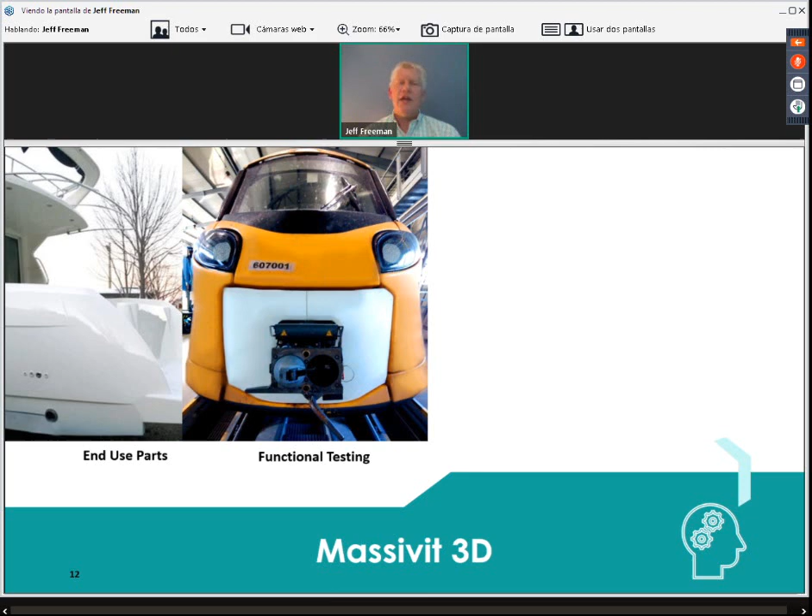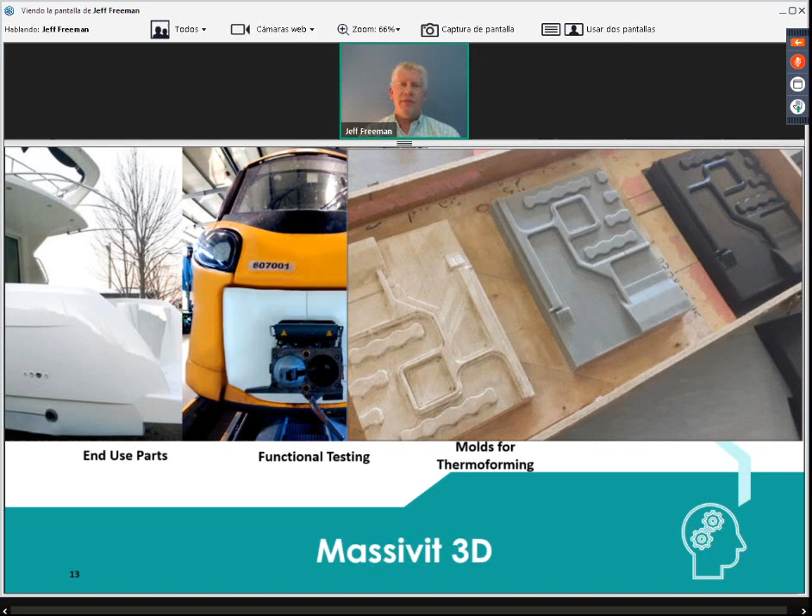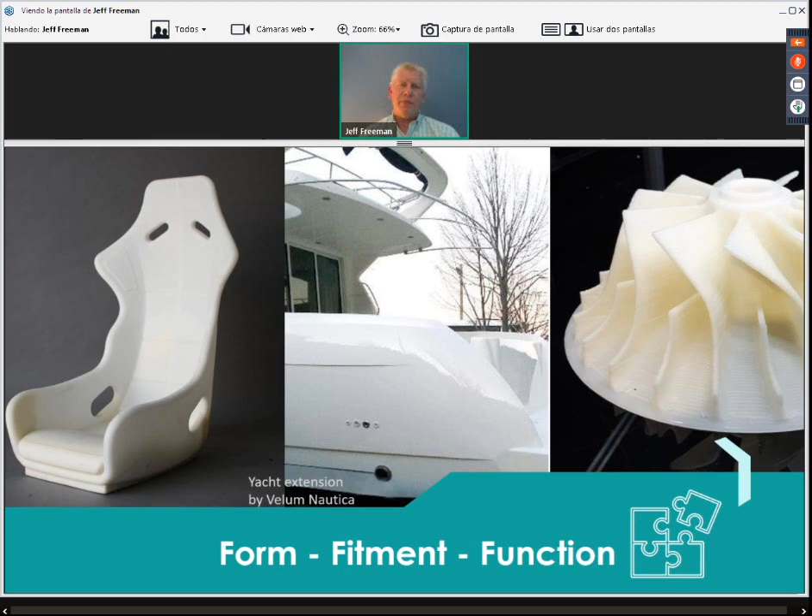This is the ability to get end-use parts—parts that can be used out on the water if you're on a yacht, or say you want to do functional testing on a railway system. We're talking about large pieces, and if you have to apply for a train schedule in order to run testing, you have a real limitation in how long it takes to produce those parts. Molds for thermoforming are very expensive to produce and often have very long lead times. So what we're able to do is actually print those molds, even large ones, using the Massivit GDP process. Traditional prototyping is often used for 3D printing and additive manufacturing, but now we're able to do it full size—form pieces, fitment pieces, functional parts.

Beyond that function, one use is using the mold to produce plastic pieces. The items on the left of your screen are actually a mold that was printed with one of our partners out on the West Coast. It's for an aerospace plastic part. We were able to print that mold, then they were able to finish it and use it to pull plastic. We offer a full proof of concept white paper for that. Anybody interested can look on the right side of the screen.

You can expand the panel and you'll see it as a handout. Our product brochure is there along with this proof of concept white paper, which talks about how they were able to print the mold very quickly and produce over 50 parts, with all of the data included.

On the right side, you see some typical point of purchase displays. It's a very dynamic industry—they need to move very quickly, so you want to be able to produce molds very quickly. In a complete opposite turn, which we'll get into detail on later, you can actually print the mold and then fill it with concrete, plaster, or other fillable material. Using the Massivit, you get end-use parts printed out.

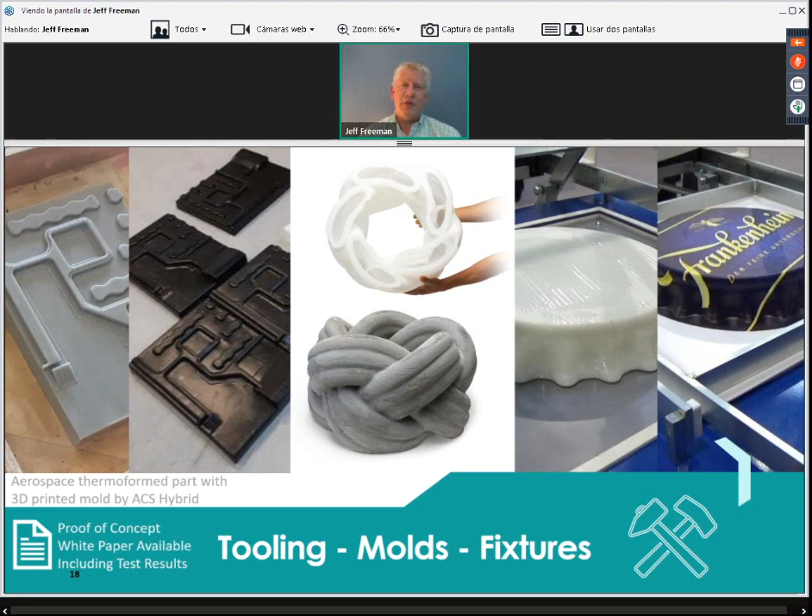So what we've talked about so far is just a few of the applications for end-use parts. Installation and fitment checks of full-size parts are uncommon using 3D printing because some automotive body panels are much too large—it takes too long to 3D print those. Well, now using the Massivit 3D printer or the Massivit GDP process, we're able to produce an entire body kit of automotive components for this client.

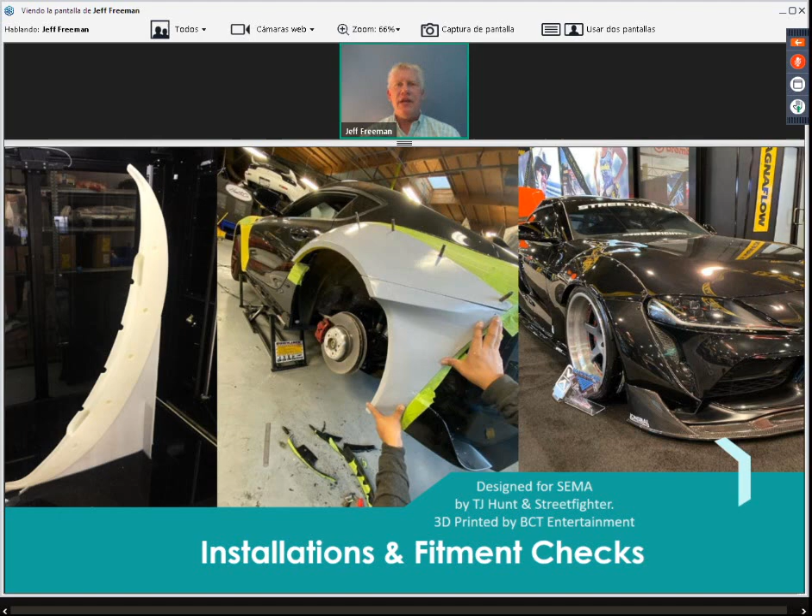He needed to build a custom body kit onto a new Supra and roll it into the SEMA show in 2019. Of course there was no SEMA show in 2020, but in 2019, in about two weeks, they were able to produce the entire body kit, mount it up, sand it, paint it, and roll the new Supra into the show. It's a really phenomenal and revolutionary application for 3D printing—just no way to do it with any other technology.

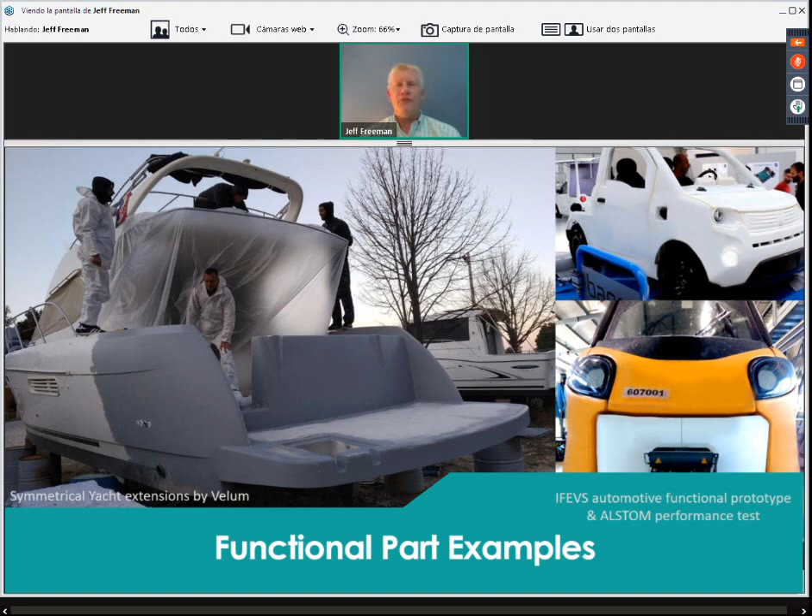Now, a lot of people ask about the Massivit GDP process, and how you can use 3D printing differently than they're used to today. A lot of people use 3D printing for desktop models—something to put in their hands, to work around the desk so engineers can look at it. We're talking about being able to produce full-size functional parts.

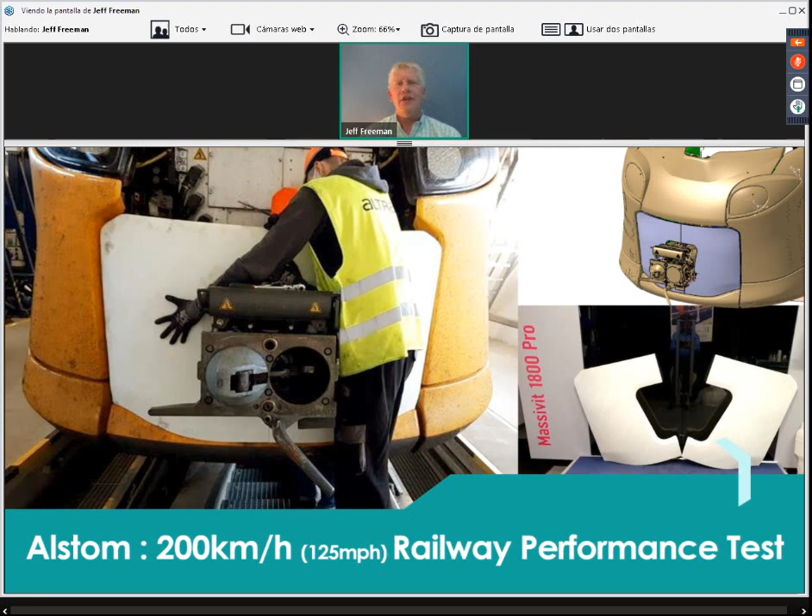Talking about that train example I mentioned earlier—Alstom is a very large company, a railway industry giant. They needed to do a noise test at full speed on the railway, at 200 kilometers per hour, about 125 miles an hour. You need a part that can withstand the vibration and the environment this testing is done in. That's a piece that can be printed full size, typically coated to add additional strength and durability, then mounted up to run the noise test. They were able to do that much faster using the Massivit technology.

Another example, based out of Europe, is a group developing an electric vehicle that will be offered in a number of different configurations. How do you develop all these different interior and exterior components for your electric vehicle in the prototype stage, while still being able to fully test that vehicle?

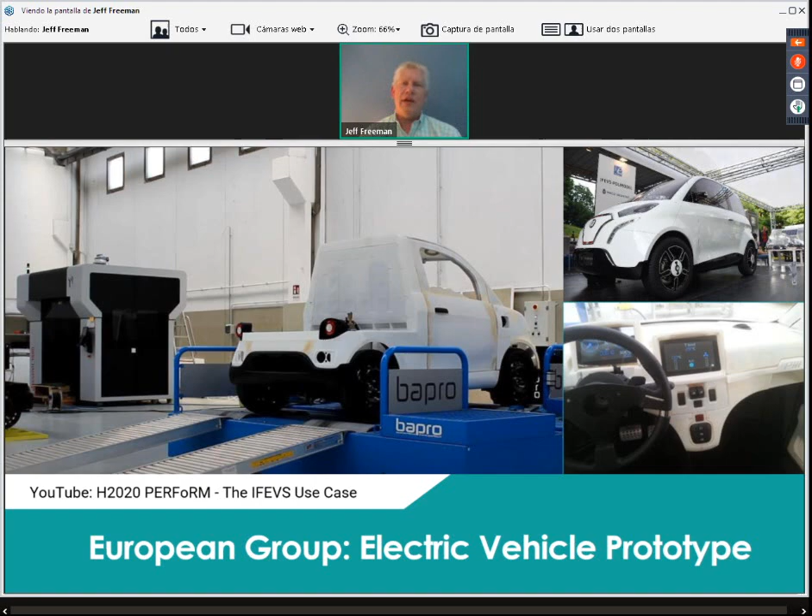We can even watch it on YouTube, here are the links available. They use Massivit to produce the exterior and interior components for this electric vehicle they're developing for the European market.

Now, I realize this comes off as a little bit of a sales pitch, it may even sound like marketing hype, but we're talking about a true change in how things are printed — something that can be printed full scale, like for a yacht you can be on, that would take days or even weeks using any other 3D printing technology.

A company that makes customized yachts had a client who wanted to extend the swim deck on their yacht, which meant extending the body of the yacht as well. As anyone in manufacturing knows, you have to consider the environment the part goes through — the physical demands, the weather, being on the water.

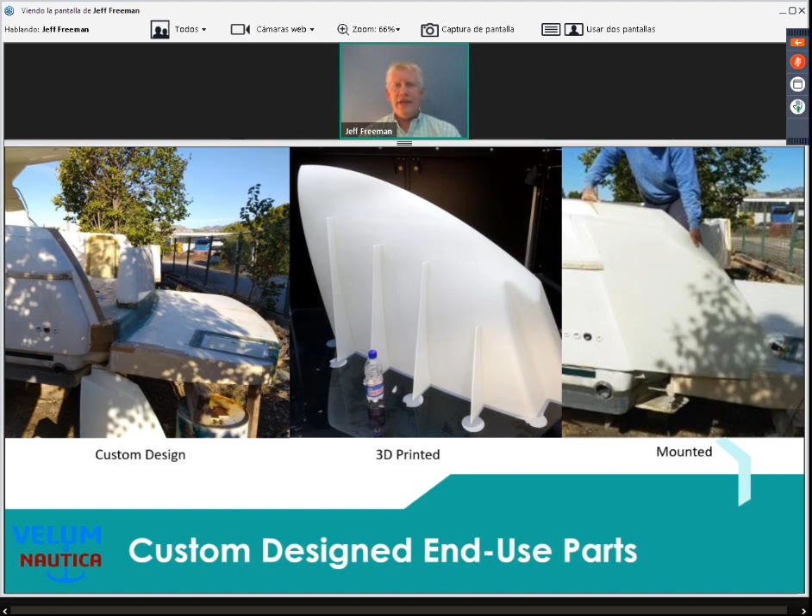This customer worked up a design, made a symmetrical full-scale part, strengthened it, gel coated it, and put it on the yacht and on the water. These are parts being used out in the world.

That's just one quick benefit — you're able to continue bringing out customized pieces for people who are ready for them. But beyond that is the amazing cost savings in time.

This same company that produced the yacht parts also produces other custom pieces. A typical yacht dashboard may be a single flat panel with some cutouts for gauges, but he wanted to customize it. Making a custom designed dashboard would normally take days, weeks, or thousands of man hours — they're able to print that entire dashboard in about 8 hours.

Now, it's not able to be used out on the water as it comes off the printer. A lot of people ask about fit and function of our parts once they're done printing. When we get into a really physically demanding piece, people apply different coatings — you want to change the surface finish, change the strength characteristics, or meet a particular application.

All of this is available through our finishing guides. We've worked with clients all around the world and can recommend: try this coating, try that coating, here's the recommended manufacturer, here's how it can be applied. We may have even done a video demonstrating it.

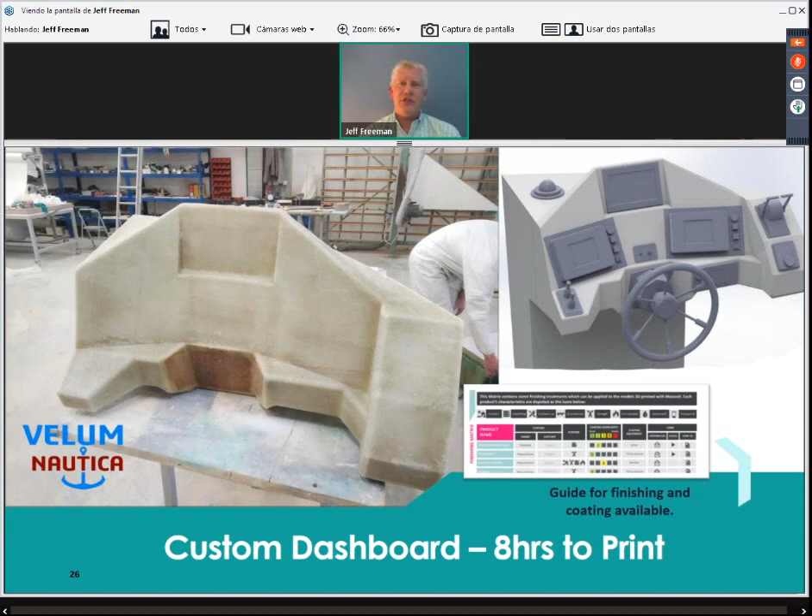This dashboard was printed in 8 hours, so you save thousands of hours of manpower creating it. Then they coated it, installed it, and used it on the yacht.

Outside of traditional engineering and manufacturing prototyping applications, we can also use 3D printing to advance long established technologies, like concrete casting. Concrete casting is typically done using a wooden form — the form is created, then concrete is filled in to achieve the geometric dimension. It's not always the most efficient way, but it is the easiest or more traditional.

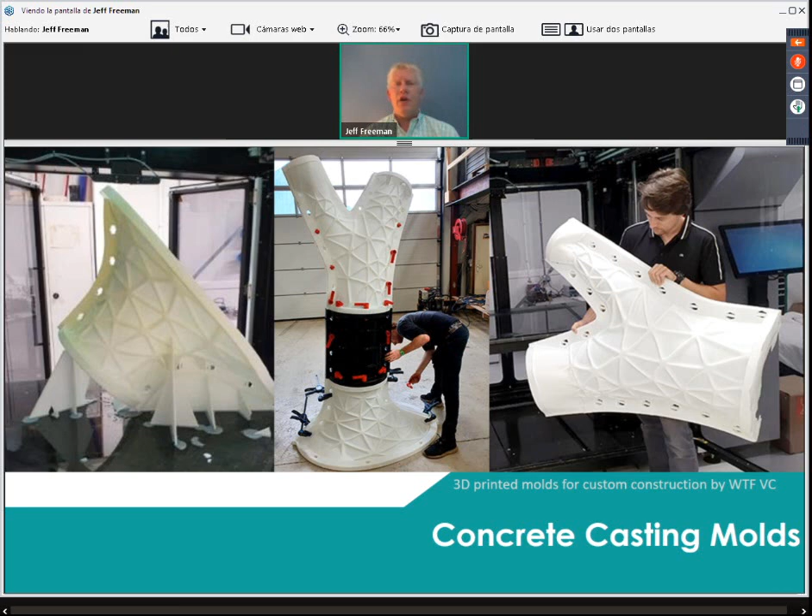Now we can actually print full scale, full scope concrete casting molds. This can be organic in nature — this one happens to be used for a functional organic shape made out of concrete. You can get into concrete artwork, outdoor furniture, construction elements.

Anyone involved in the infrastructure plan being talked about today, that's hit the news with a big bill going through Congress — no matter where you fall on your agreement with this infrastructure bill — the most efficient way to produce parts benefits anybody making these pieces. If we can improve the process and reduce the amount of time, reduce the amount of concrete, and make an impact on climate change, all of that can be done using Massivit technology to produce molds.

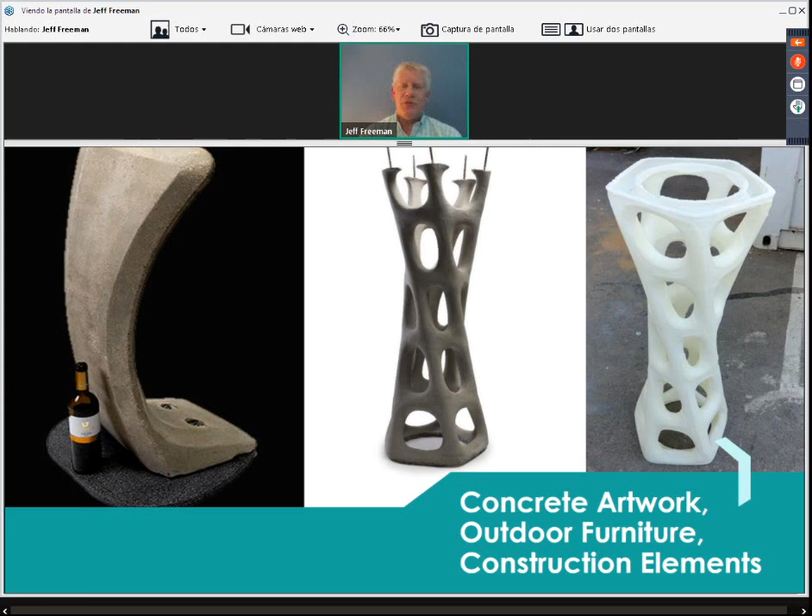So we're talking about a huge benefit across the world by using the Massivit GDP, producing a mold but still getting traditional end-use parts. That allows you to use traditional materials. You have no compromise in having to use an additive manufacturing special compound. You actually use our technology to improve your process, not necessarily to just make a compromised part. That really gets you out into the world in the way that you're going to create this improved workflow for creating your final parts.

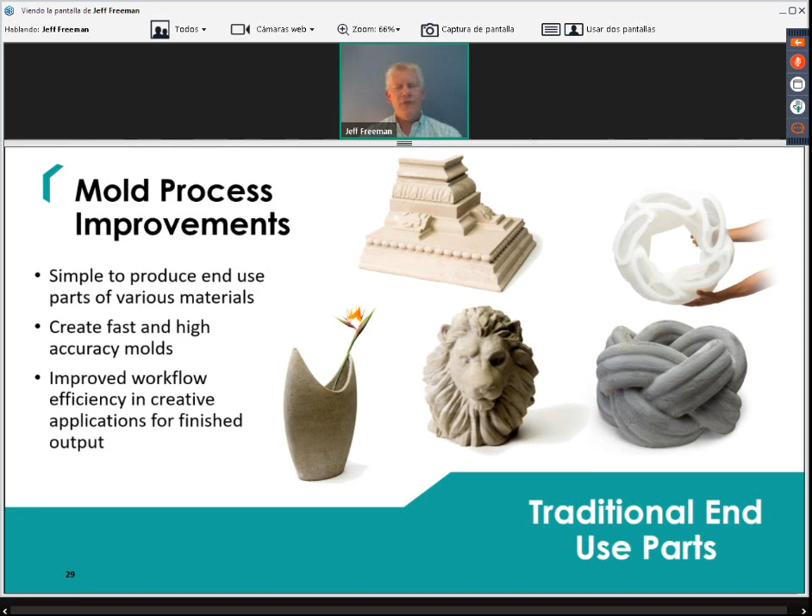So there's a number of different applications we talked about, really focused on the industrial world, focused on manufacturing. But I also want to get into just a mention here about some of the different markets that are using 3D printing and additive manufacturing. Now, I should point out, this particular webinar is focused on manufacturing. We have a lot of people from different industrial markets here.

But we also have some people from what we call visual communications markets, people that are more creative in nature than engineering in nature. We will have another webinar focused on this market in the next couple of weeks, but right now I'd like to touch on it, talking about 3D signs and 3D channel letters.

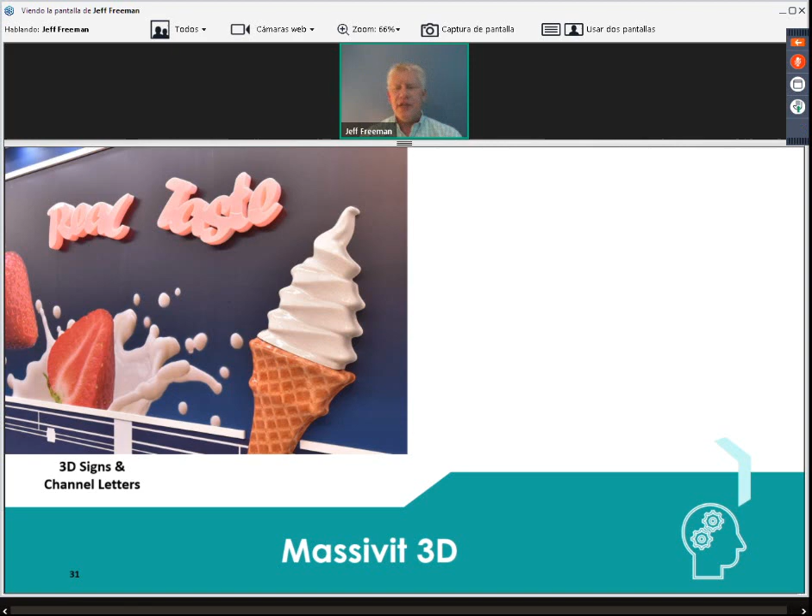This is a new thing for this market to use a 3D printer. Scenic fabrication and props in theme parks, used in movies, now full scale and full size pieces can be printed and save that time instead of having to be all handmade. The artisans can really focus on the message, not just the mechanics.

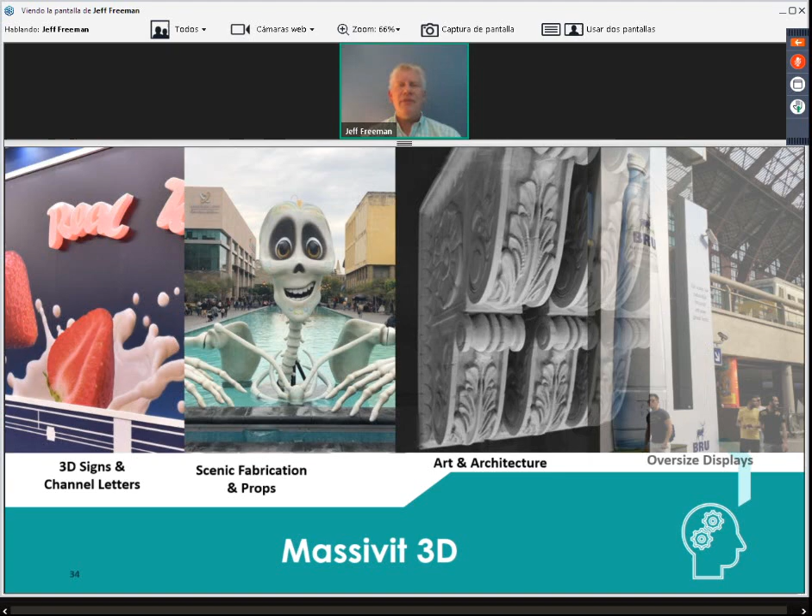Art and architecture around the world is being scanned and put into 3D. Now we're able to produce either the part to be used as a simulation or actually a mold, and you can make oversized displays and large impactful pieces. We're talking about scenery and exhibits, displays that become that much more effective and impactful. You're going to get a lot more engagement with people no matter what you're doing—a marketing piece, a trade show piece, or just a display at the museum.

Anyone driving down the highway has probably seen the three-dimensional billboards that are out today. Now that becomes a real de facto sense, being able to use three-dimensional printing to produce the parts. Nobody else could do this using a 3D printer from any other technology. The traditional pieces may be made out of plastic and may take weeks to produce. So you wouldn't create a channel letter like this that has a shadow effect to make more impact unless you use the Massivit GDP style printer.

Now our material is translucent. It's white or gray, and I'll get into some of those details later. But with the white material, you can actually light it from the inside. You can add color to it. You can actually add effect to your parts by bringing out the different shadowing effects in a functional piece.

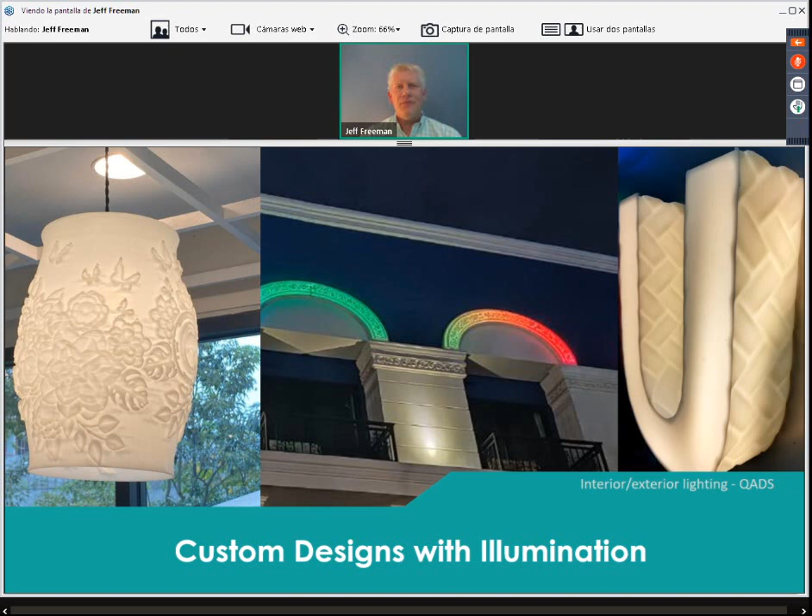These are parts that are printed, coated, and installed on walls outside, inside, and used all around the world. We're talking about large parts in hours instead of weeks. Traditionally, this would be weeks of time to try to produce. So what we're talking about is a very unique technology.

Now, I've talked about the applications, I've talked about manufacturing, I've talked about industrial pieces, but I think it's important that we point out how unique this technology is. A lot of people on this call probably have used or are using three-dimensional printing.

Massivit 3D was founded by one of the pioneers of the industry who helped develop the original SLA, or stereolithography. His name's Gershon Miller. Gershon was on the team that helped develop stereolithography. He went on to develop polyjet printing with a company called Objet that was absorbed by one of the industry leaders called Stratasys. So Stratasys, Objet, Gershon Miller—he invented and developed new technologies that have revolutionized additive manufacturing over and over again. So Gershon founded Massivit 3D around the gel dispensing printing process in order to really revolutionize and address the inadequacies of the typical polymer three-dimensional printing market.

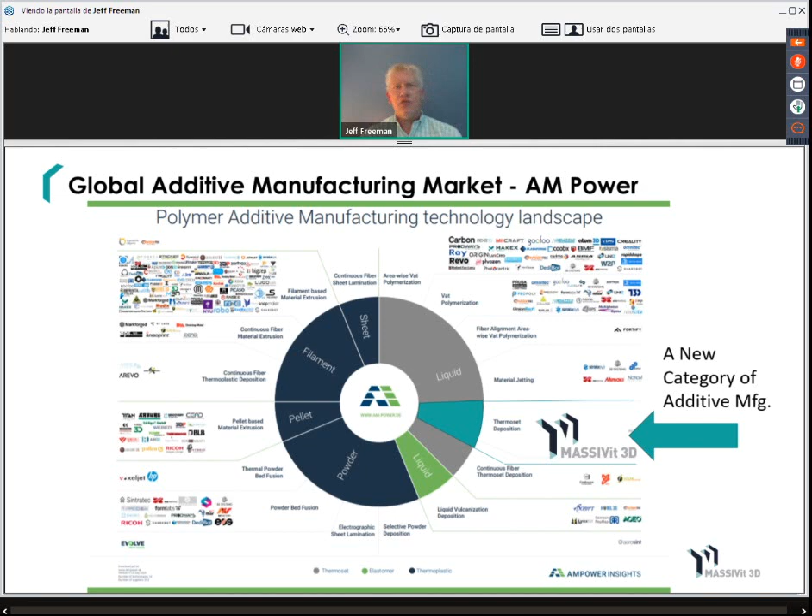You can see here a huge number of companies that are out there. There's people that use plastic filament, people that melt that through a tip using plastic extruders or plastic pellets, there's what's called powder bed fusion—a lot of different technology, which you'll see. Thermoset deposition is unique to Massivit 3D. Massivit 3D is truly using and developing and inventing a new category of additive manufacturing.

Now, a lot of people want to understand a little bit more about it, and I'm going to show a short video here in a second. But in general, what we're talking about—or in specifics—we're talking about gel dispensing printing, exactly what the name is.

We dispense gel and fuse it using ultraviolet light at the point of bonding. That ultraviolet light fuses so fast that you can actually print horizontally. You can cure this material so fast that infill and support structures are not needed, or rarely needed, if we want to stabilize a large engineering-style part for dimensional stability.

We're talking about no melting, no heating, no heated build chamber, no UV oven at the end, no bath or support structure that has to be later removed. A very, very fast process, and that speed unlocks our size, and not just our size, the size of the parts that you want to produce. Talking about that full-size door panel in about 30 hours. That's truly unbelievable if you know about how parts are produced.

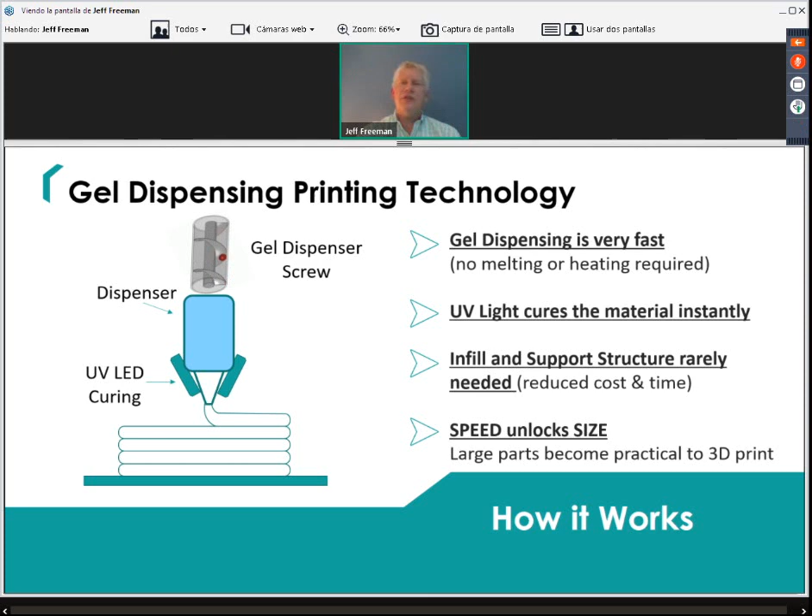Now, what I'm going to show will be a short video that really demonstrates what Massivit 3D is focused on, what our technology is like. It's a little bit of a promotional video that's available, but I want you to really see the key points that are involved in Massivit's technology.

30 times faster than melting plastic. We're talking about an extremely fast process. And because we're so fast, we have a build volume that is 100 times larger than a 1 foot by 1 foot, 1 cubic foot desktop 3D printer. The most common size that's out there is 100 times smaller than what we can provide.

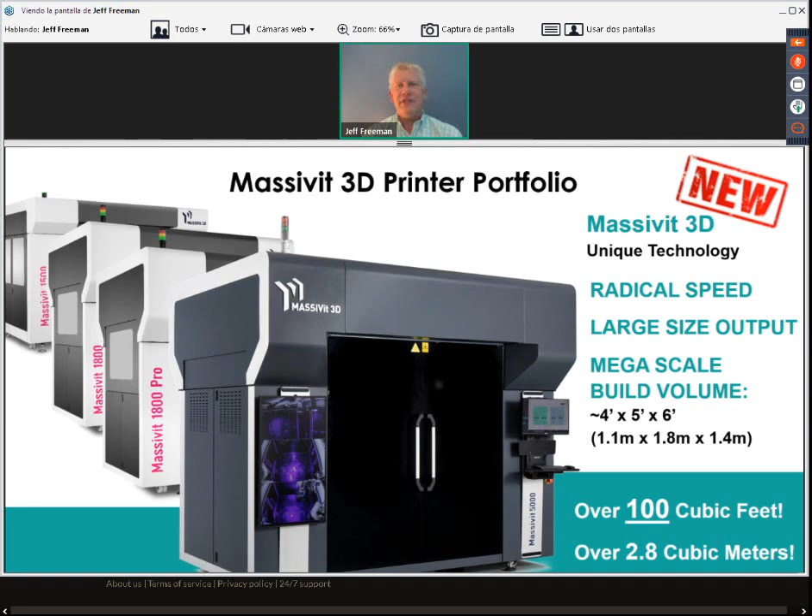There's another company out there that talks about how big they are at 1 cubic meter. We're 2.8 cubic meters. And the only reason we can produce such a large build volume is because we can use it—it's practical. The speed of our printer allows you to use the materials to generate full-size parts. It does you no good to print a part that takes weeks to produce, because your design may have changed by then. Let's get a part to you this week, this day, rather than in weeks or months.

Now we're going to get into a little bit more detail on our latest edition of our printer portfolio. We've talked about gel dispensing printing, we've talked about our applications and how we can use it. Now let's talk about this hardware.

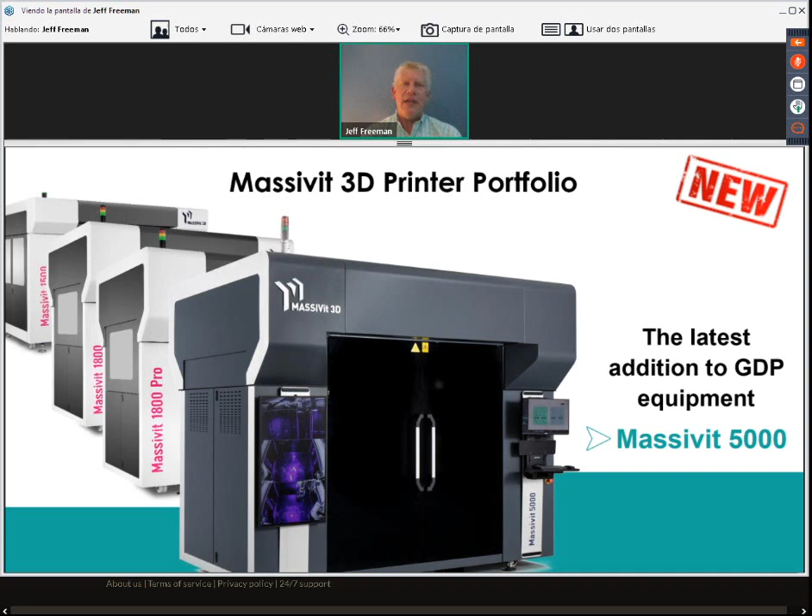And just in May, we introduced at Massivit 3D the latest Massivit 5000 3D printer. This additive manufacturing printer has some of the highest technology available out on the market today.

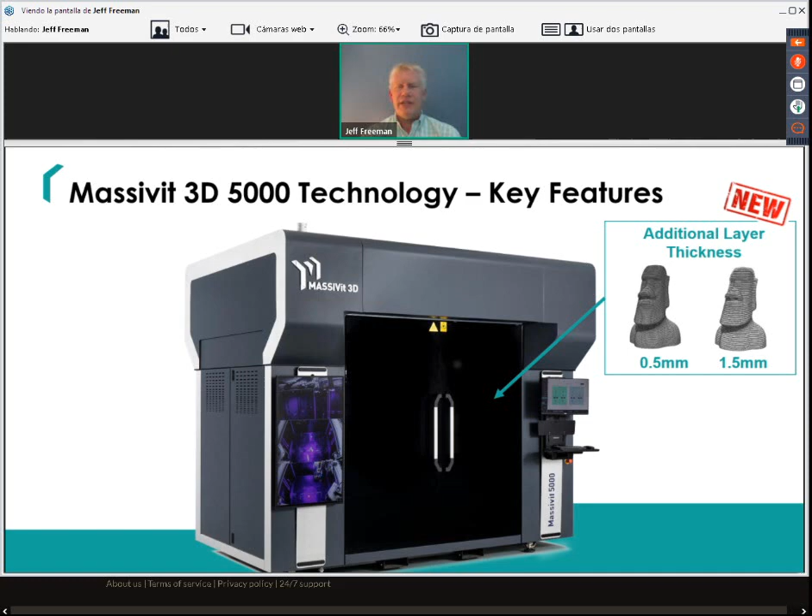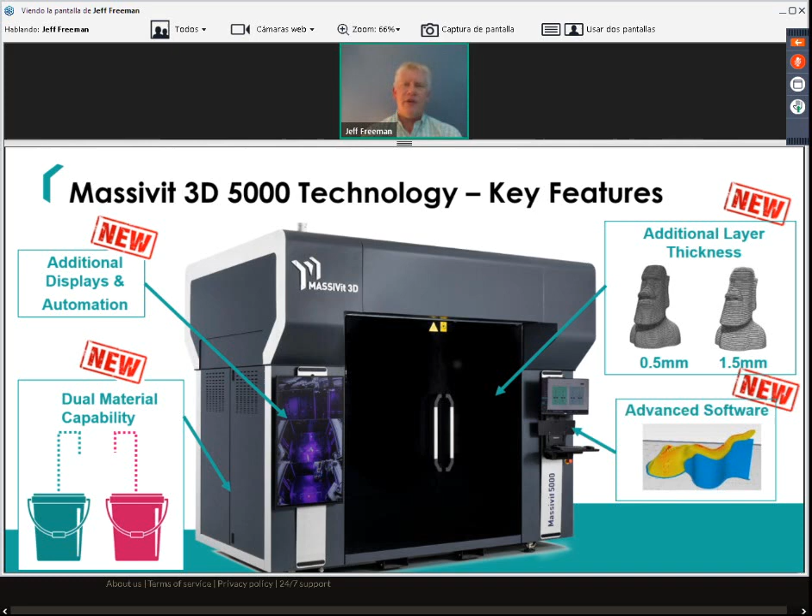We've expanded with additional layer thicknesses, and we'll get into some details on each of these points. We've added additional material capabilities where we can run two materials at once. We have some advanced displays and advanced technology that'll really help you get your throughput and workflow efficiency up. And of course, we always take in the feedback we've gotten from our clients to adapt our software and improve our technology.

So some of the key features we talk about on the Massivit 5000 is the fact that dual head printing is now standard. Now, we do offer a base 1800 unit that has a single head that's not upgradable. That's certainly available at different price points all around the world. We regionally focus on the hardware, the materials, and the rest. But what we're talking about is the same product line available.

Talking about the 1800 with a single head versus all the way to the Massivit 5000 with dual head printing being standard means you improve your workflow efficiency. You can get two parts out at the same time. Those parts are fully independent. Those heads work independently of each other. You can actually run different materials on each one, and you can also do different resolutions, different layer heights with each head. That's really revolutionary in the industry. You don't just move the panel down, you actually adjust the head as well.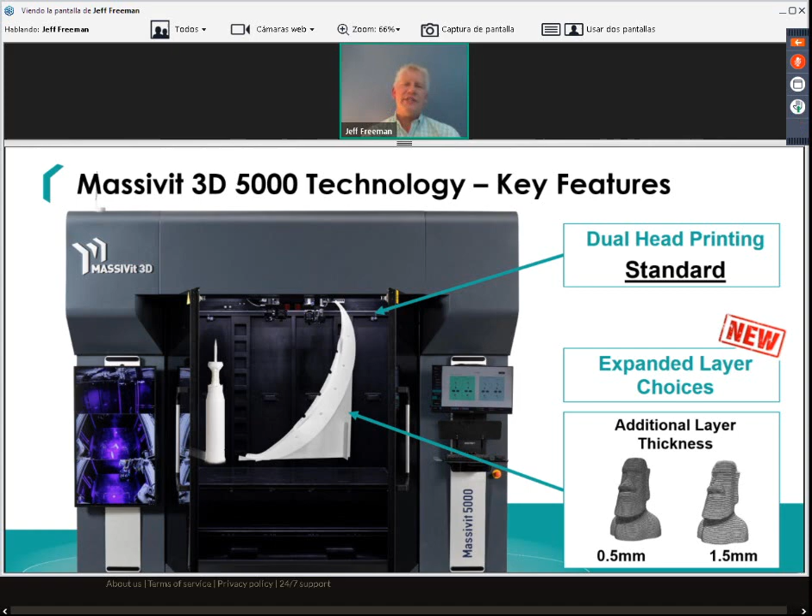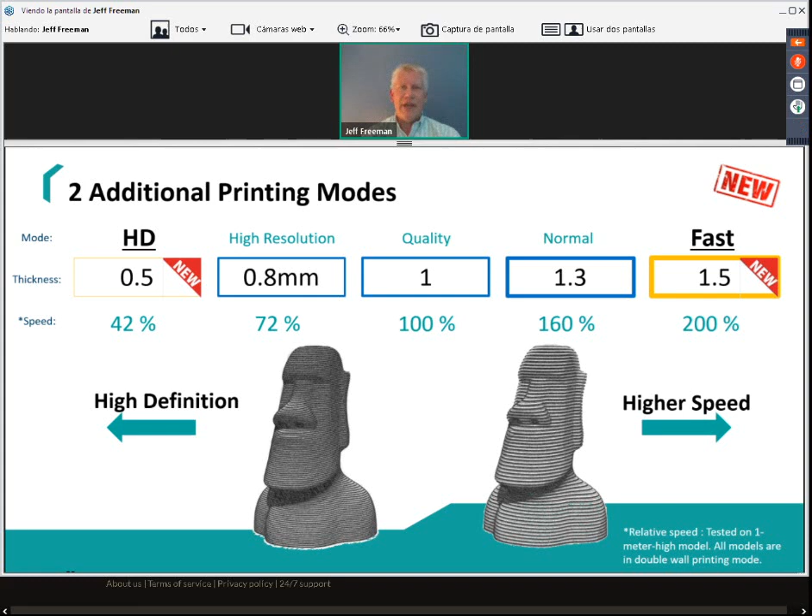So with this expanded layer choice, you've got 0.5 millimeters now, which is about 20 thousandths of an inch, or 1.5 millimeters. Here's a chart that shows you go from a very high definition part all the way to a very fast part. You can improve our already radical speed by printing at a thicker layer. That thicker layer means that you get your part even faster. Just talking about some very high speed printing when you're running at the fast mode.

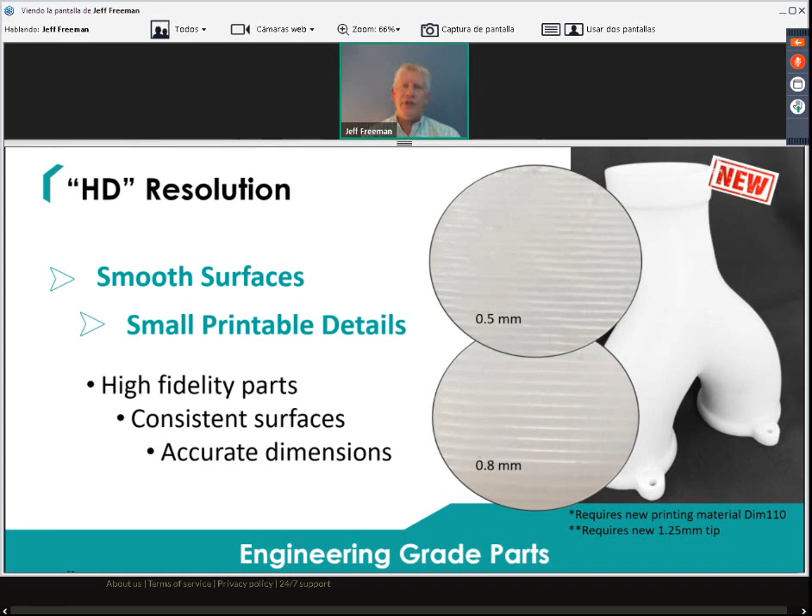Now this HD resolution is also pretty revolutionary. It's 0.5 millimeters, about 20 thousandths of an inch. You get really smooth surfaces. You have small printable details on your parts. What we like to say is engineering grade parts. We're talking about high fidelity, consistent surfaces. These dimensions are much more accurate than you might expect out of a printer of this size and scope. You're going to get good, solid parts that you're going to be able to use for your form, fit, functional testing.

Now, in combination with that, Massivit reviewed and looked at what else they can do with the printer to try to improve your return on investment. So we've involved a dual material system. Instead of a single bucket running to one or even the optional two heads in the other printers, now we have a two material system. You can run the same material or different material on each head of the printer. That means that you can use the high fidelity HD quality material on one head and maybe the more cost-effective DIM90 on the other head.

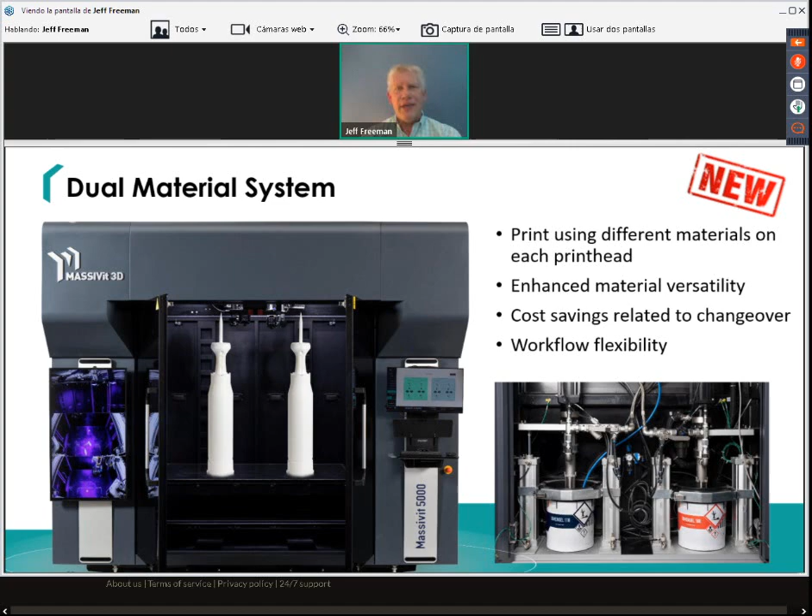All the physical characteristics are pretty similar, but we have some spec sheets and everything that we can share with you. And again, we're happy to share all that with you at any time. Really, it helps you focus on what your needs are and really apply the printer to your application. Now, beyond the hardware and the physical use of the printer, we're trying to update also the ease of use functions. We started to get into the advanced monitoring.

Now, anybody who's involved in 3D printing and additive manufacturing knows that it's possible that the plastic didn't melt right on somebody else's machine and that you walked in and you didn't have your part ready. Well, Massivit, because we extrude gel, can keep an eye on that print head very, very closely. Using a computer algorithm, we have a vision system that watches that exact point of printing so that if we see an inconsistency, we go over and clean that head instantly. It's not based on time, not based on layers, although those can be involved.

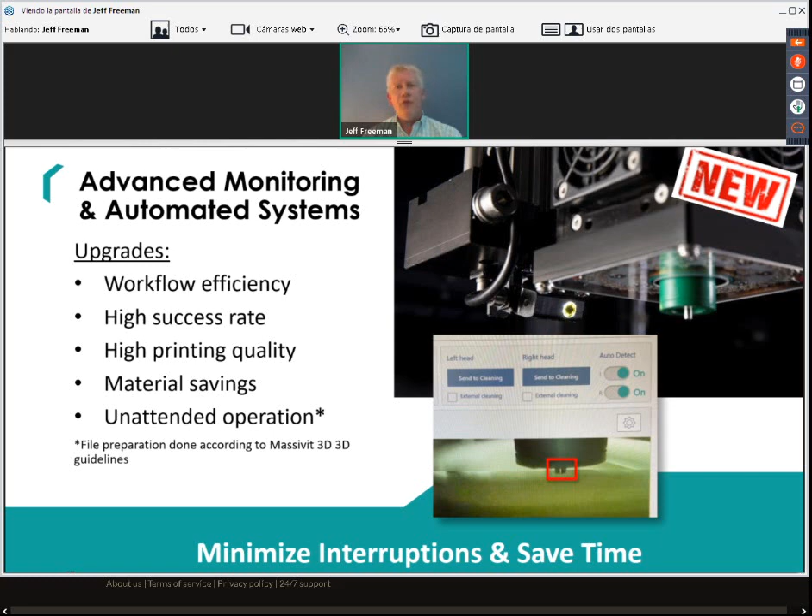Now we're also watching for that closed loop feedback system. You get a very high success rate. That means you print it with high quality and you can really run unattended when you follow the steps and specs that we clarify for running unattended and printing a full part without error.

Outside of what I call the back end, the back office advanced monitoring system, we have front office improvements as well. We've automated our file preparation.

Some people, as large as our build area is, want to print parts that fill every bit of it. To do that, you don't want your part hanging off the sides. So the smart slicing software that comes with the printer has an auto-orient feature. It runs a computer algorithm and aligns the part into the best possible position for the best possible print.

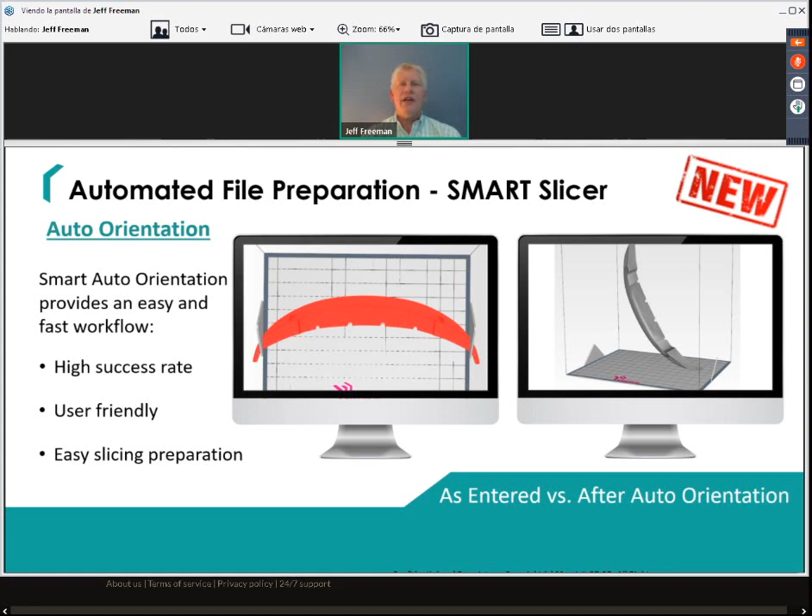That's just one more feature we've put in to improve ease of use. Now, beyond the software and the technology, everything we've done as a company has been focused on getting you the best product, improving, and taking in your feedback to improve your experience.

So we've added an additional 40-inch high definition monitor. There are 3 different cameras in the build area. We have a 4-foot by 5-foot by 6-foot build volume, and if you think about it, your last print layer is almost 6 feet high.

So what we try to do is put a camera on it, that way you can see everything very easily. You can actually record that as well, so now you have great video feedback for your clients, for marketing, for recording purposes, and a lot of different features that you can tape and record and put out onto the screen.

We've also taken some feedback about the servicing and material area. We've expanded and enlarged the service doors so that the material is even easier to use. And of course, we've updated our user console to make it a little more ergonomic, really focused on ease of use, taking in feedback and applying it to our next technology.

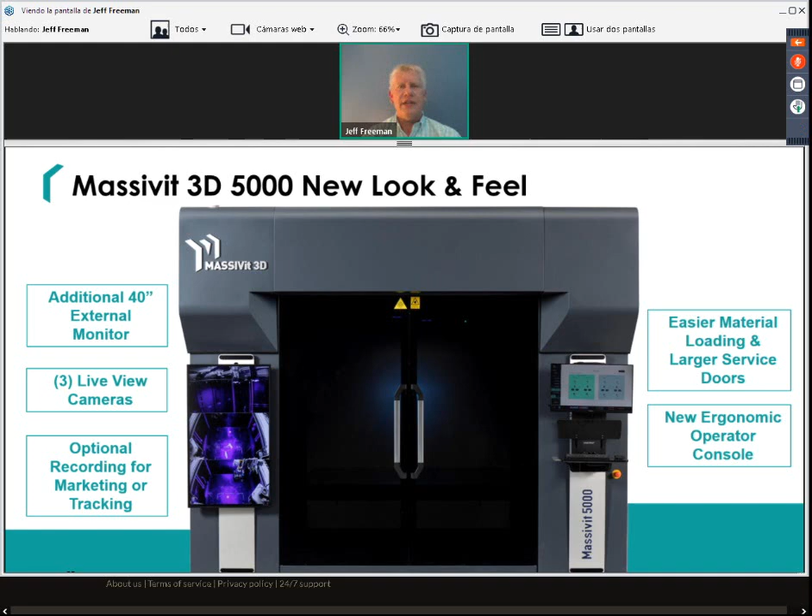Now what we'd like to do is connect with our headquarters over in Israel. Our headquarters is in Israel, where we've got a team of people focused on design, development, and production of the 3D printers. The printers are also supported regionally, by either regional Massivit teams or regional dealer partner teams, in Europe, Asia, and here in North America. We're all over the world for your service, your support, and your materials.

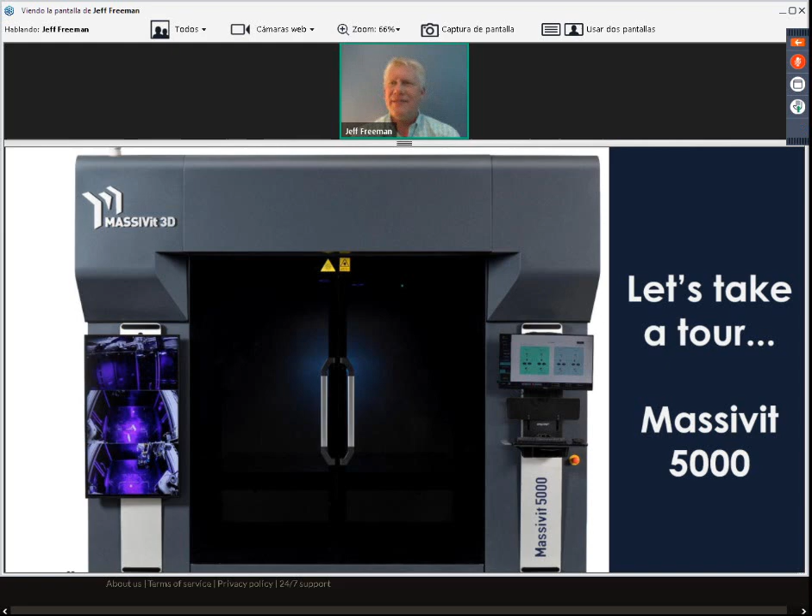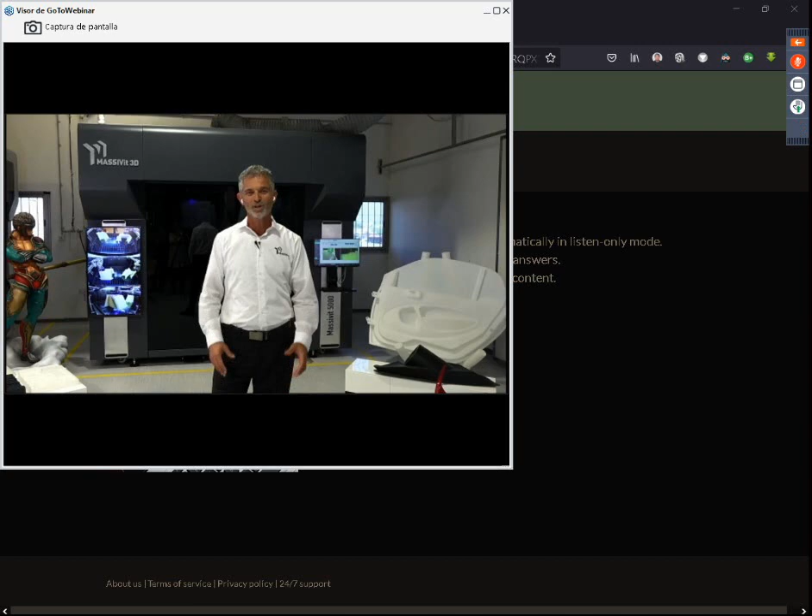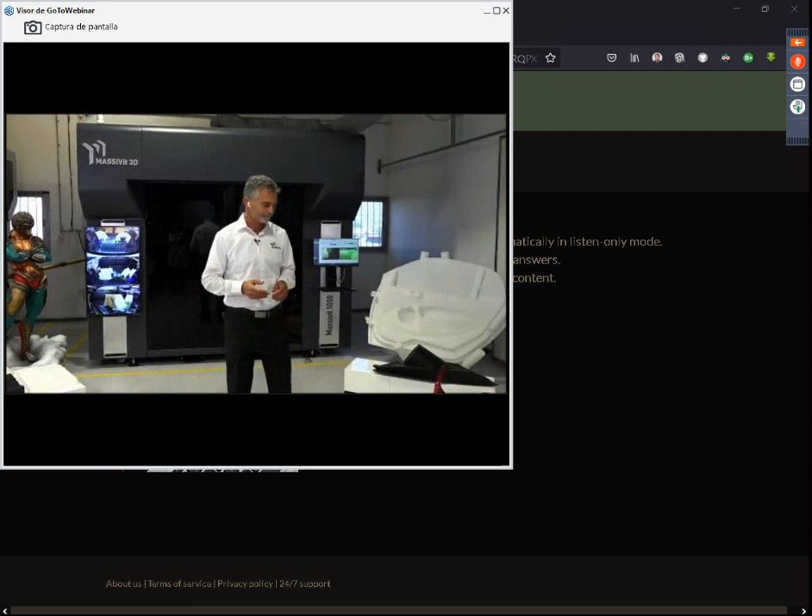Thank you, Jeff, so much valuable information. Welcome to Massivit headquarters, 10 minutes away from Tel Aviv. We welcome you to our new launch of the Massivit 5000, and you're going to see a live demonstration of our disruptive technology. But before we dive into the machine, why don't we see some parts that we are generating with our technology? The first part I want to show you is a car bumper.

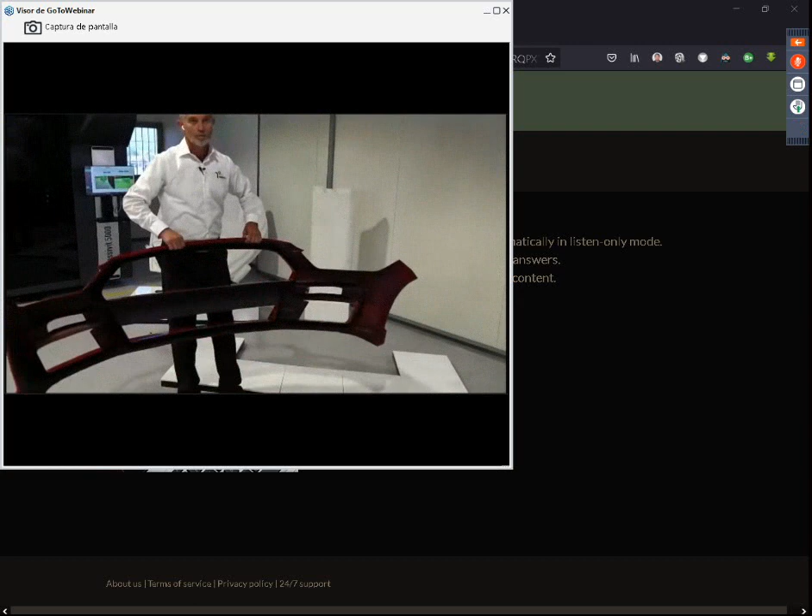This car bumper was printed in less than 22 hours, then sent for painting. If we take a look at the back side of it, we will see that we reinforced it with fiberglass. Imagine, 22 hours and you have your bumper, and it weighs less than 15 kilograms.

Another part I want to show you is a textured product. It's important that we can print very smooth, but we can also print textured product. This product is part of an engine, and we will see it also in the machine while we print it.

This is a car door, part of a concept that was printed as one part, including the windows and each small detail that you can see here. I want to take it, show you how light it is, and also present the other side. You can see that we printed even the mirror, everything in one part. Even the stand that it's on is printed by a Massivit 5000.

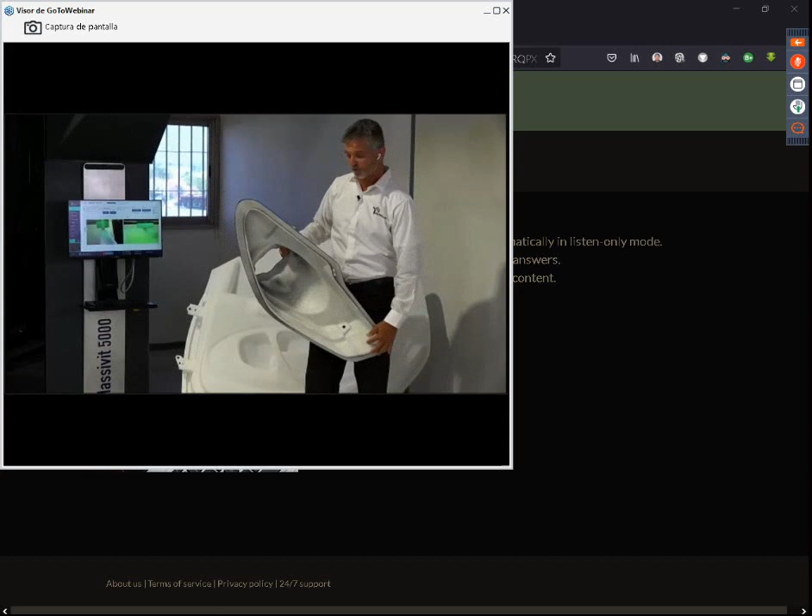Another part I want to show you is a technical part, part of a bus light that was printed, painted, and also protected with fiberglass. We are going to see this part as well as we print it at the Massivit 5000.

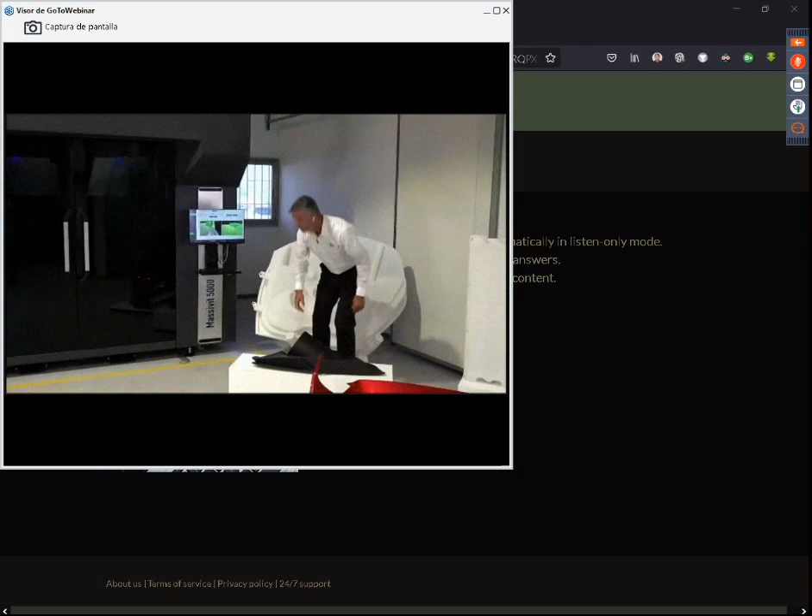Jeff was talking also about other applications, and I want to present an application coming out of vacuum forming. This is a real project coming from aerospace. This part was printed in a few hours, and we took 50 parts out of it. It's a real part that can solve a lot of problems. Imagine creating your parts the same day, creating your mold the same day. So how is Massivit 5000 doing it, and doing it so fast?

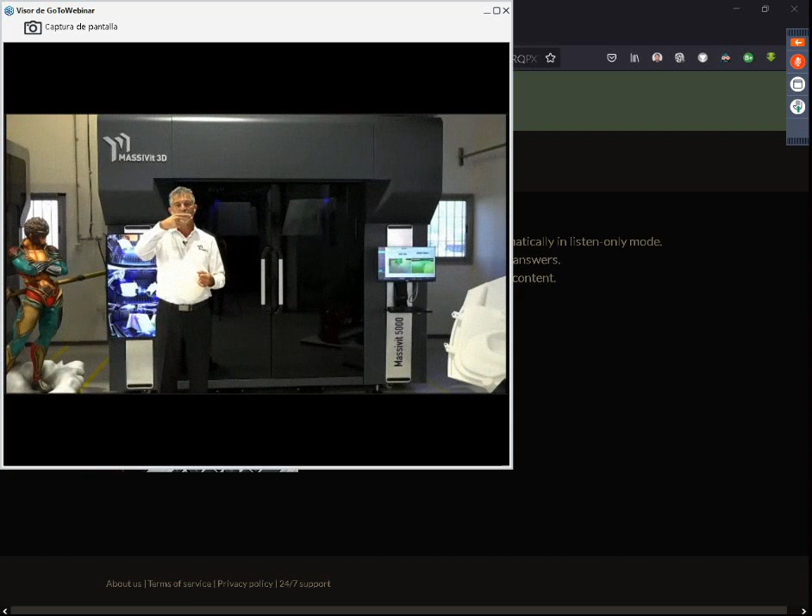Let's talk about the GDP technology. With GDP technology, we are printing one layer on top of each other. Once we print the layer, we cure it immediately, meaning the product is ready for use immediately.

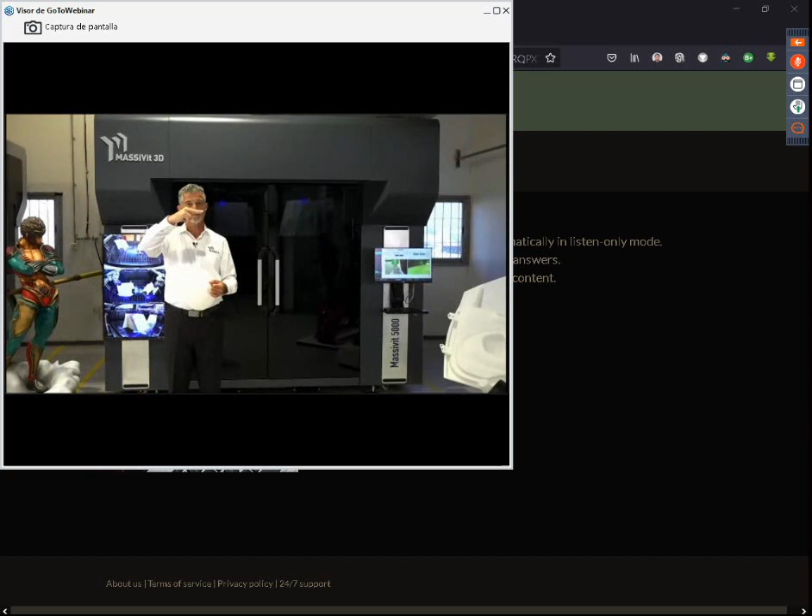If I print one layer on top of each other, I can also print one line next to each other. By printing one line next to each other, I'm generating a roof. If I'm generating a roof, I need no support and no infill. I can save a lot of money, a lot of time, and also a lot of work taking off the support, because I have no support. I have this cone here to show you.

As you can see, most additive manufacturing systems would print it that way, but Massivit prints that cone this way. We print again, slice by slice, layer over layer, and when we come to the roof, we print one line next to each other. I hope the camera can show that this object is hollow.

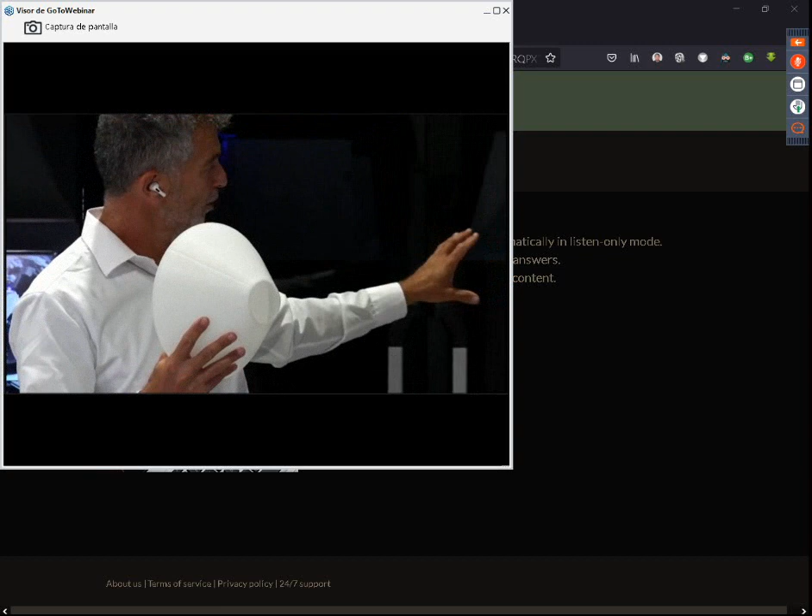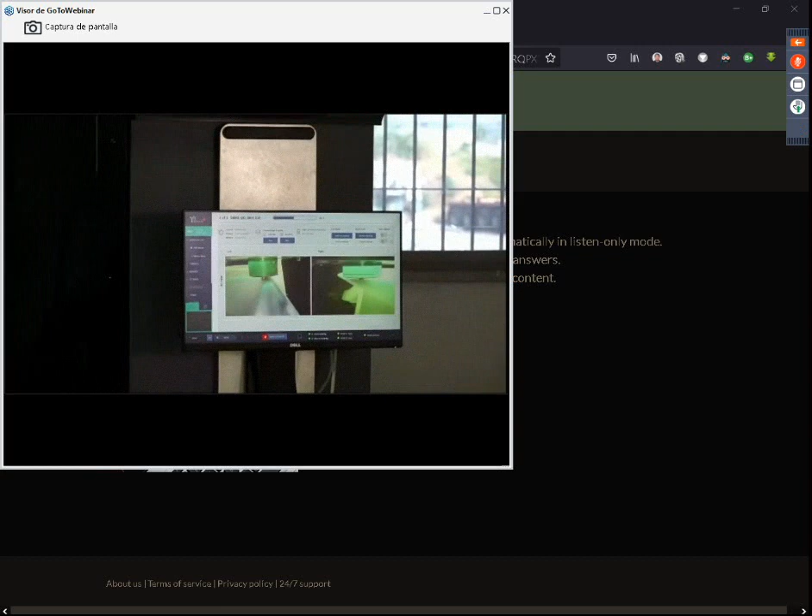If we want to see a little bit of the Massivit 5000 in action printing, maybe we'll zoom into the operator screen where we can see our technology in action before we stop it, just to show you. Okay, I hope you can see it. It's fascinating, I could take hours and hours looking at it. I think we'll zoom out now.

Victor, is it possible to open the doors for us? We'll ask Victor to open the doors. No problem.

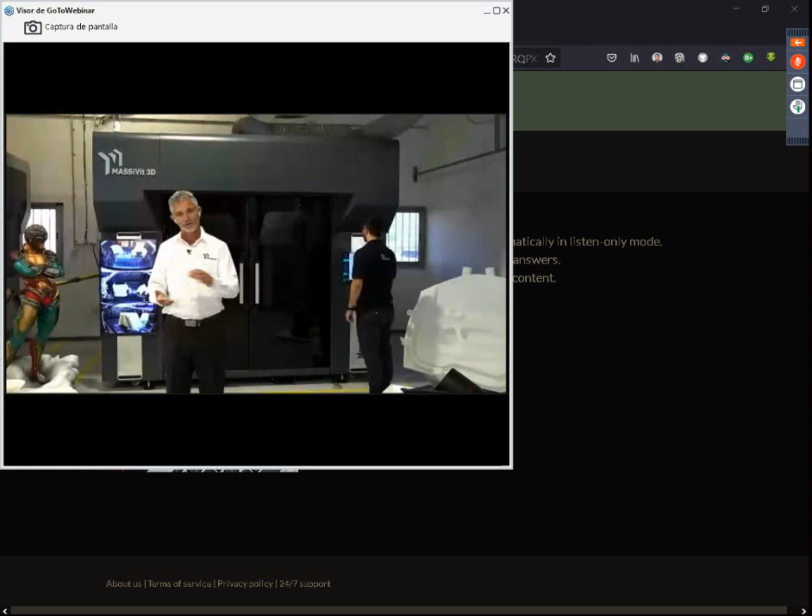While Victor is opening the door, we'll start to talk about the volume. You see, it's a big machine that we're presenting here. We have a table of 1.2 meters by 1.5, with a height of 1.8. It means you can print me in about 6 hours. It's amazing, it's enough to have one, but it's possible. Oh, thank you, Victor.

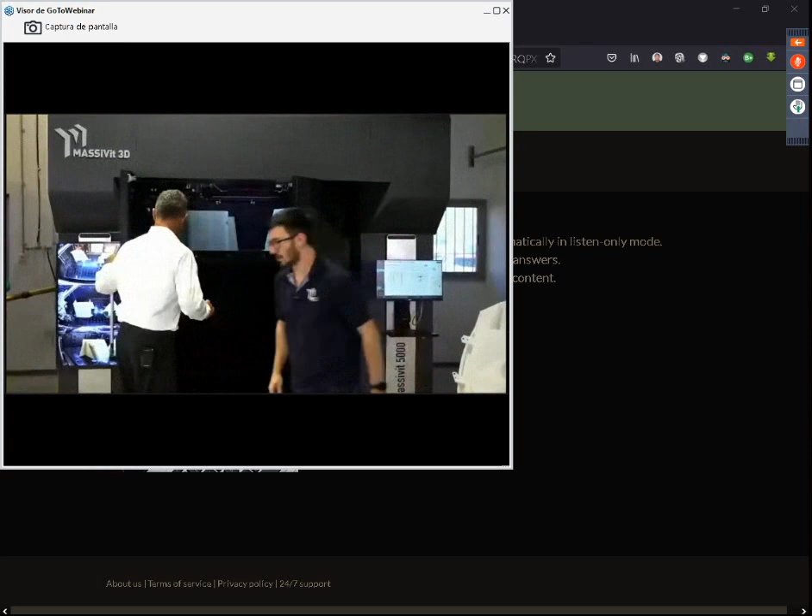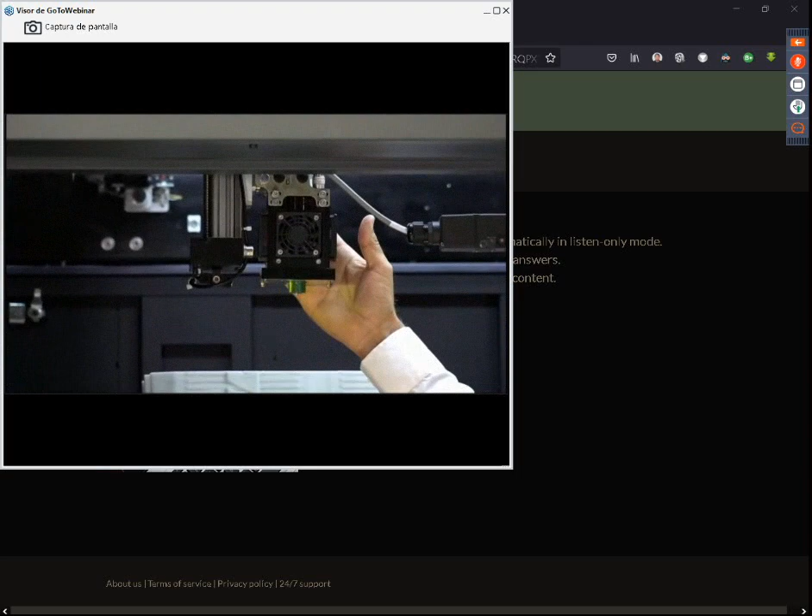Okay, we'll start on the left side. I hope you can see the core of the technology of the Massivit 5000. What you can see here is our printhead, and the printhead is designed from a dispenser.

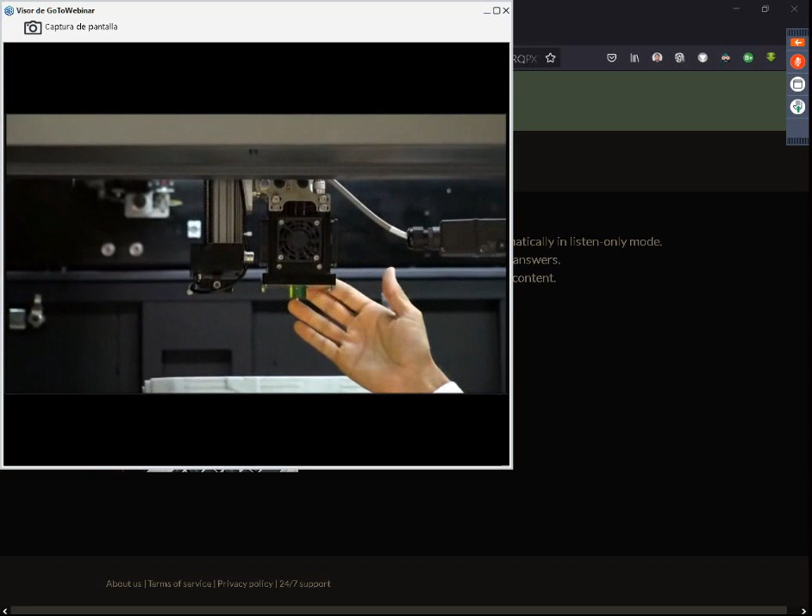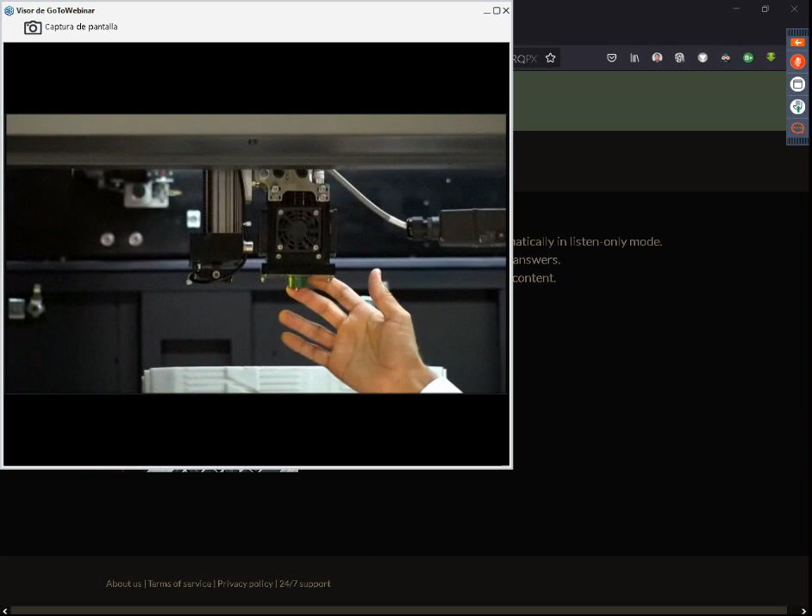The dispenser dispenses gel through a tip. This is the tip you can see here. The tip can supply gel in different resolutions, and it will be cured immediately by a UV ring set here. The UV ring will supply the optimal curing for your object. So if we give more gel, we'll use more UV, and vice versa.

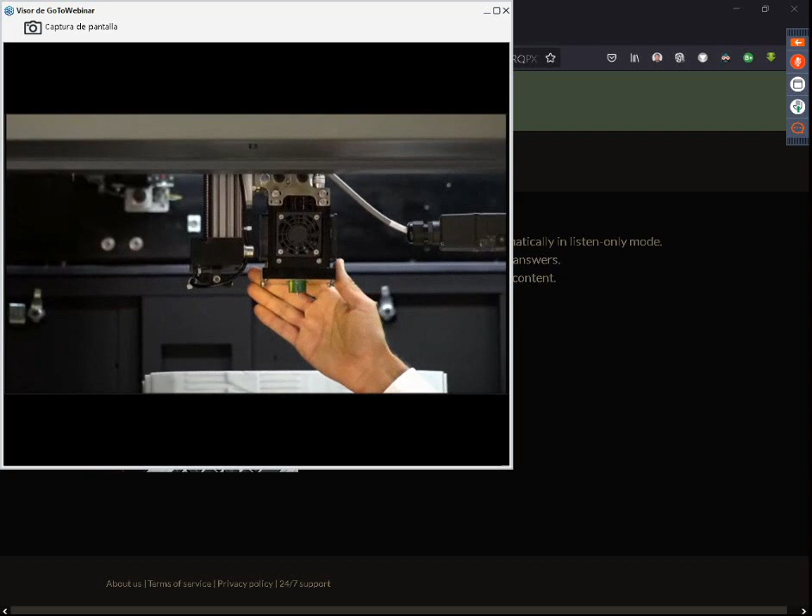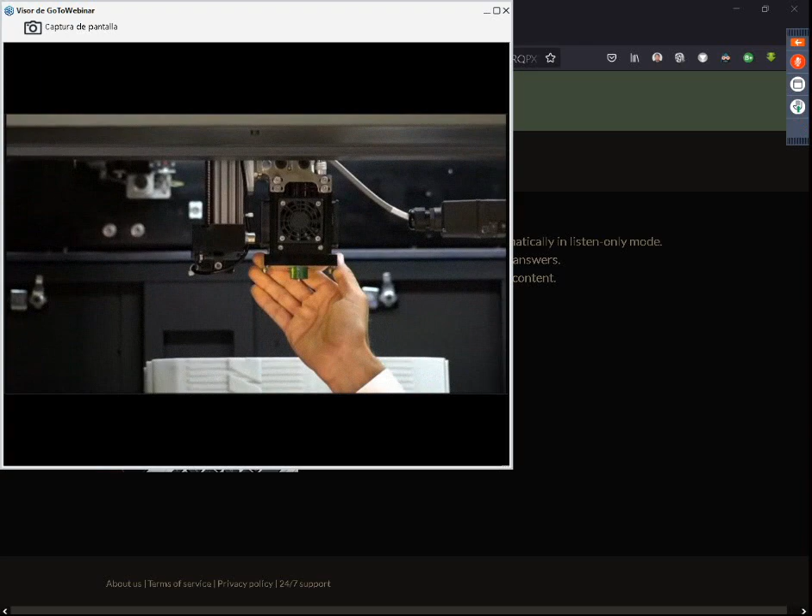Next to the UV ring and the dispenser, of course we have our camera here. This is not a regular camera, this is a detection system to allow you best-in-class quality, connected to our computer, and it will help you control your quality.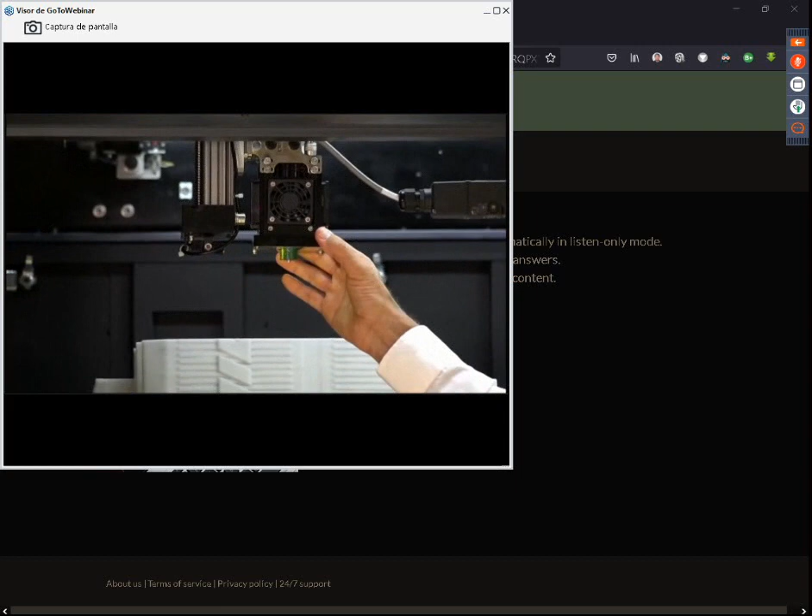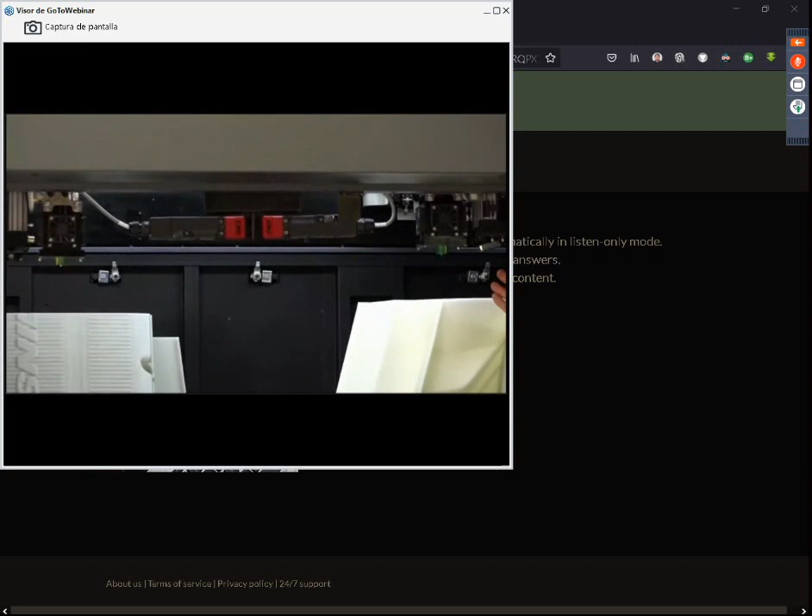This is one head, okay? So if you want to print more, what you can see is that the Massivit actually has two heads. We'll zoom out, and I hope you can see the two heads together. Just a second, or if you zoom out a little bit back.

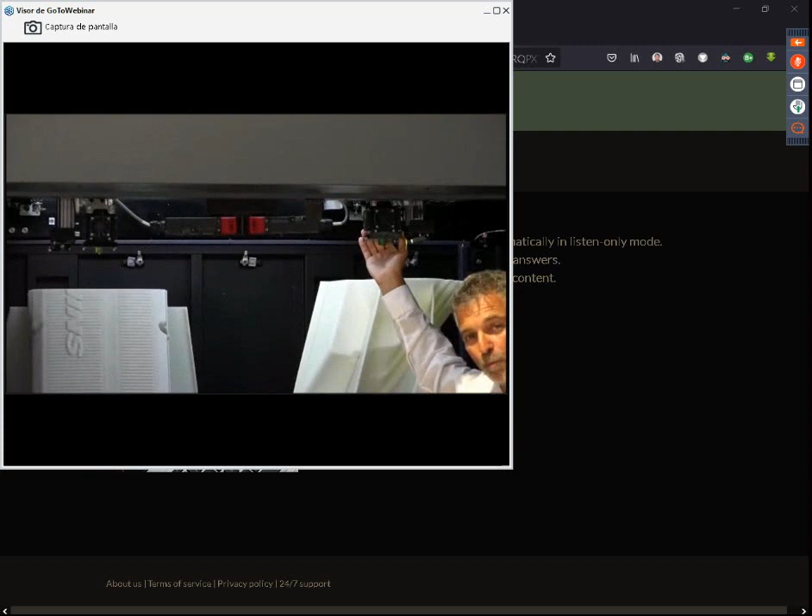This is the head that we explained about, and here we have another head. So actually, with the Massivit 5000, you can duplicate your work and print two objects. As you can see already, the objects are not similar, so I can actually print two different objects at the same time.

That means I can print different resolutions for different applications. Now, you heard in the presentation from Jeff that we're talking about a dual material system, and here at the Massivit 5000, for the first time, we're presenting a dual material system. On the left side, we have our economic solution called DIM 90, for high production, high speed prototyping, set here on this left head.

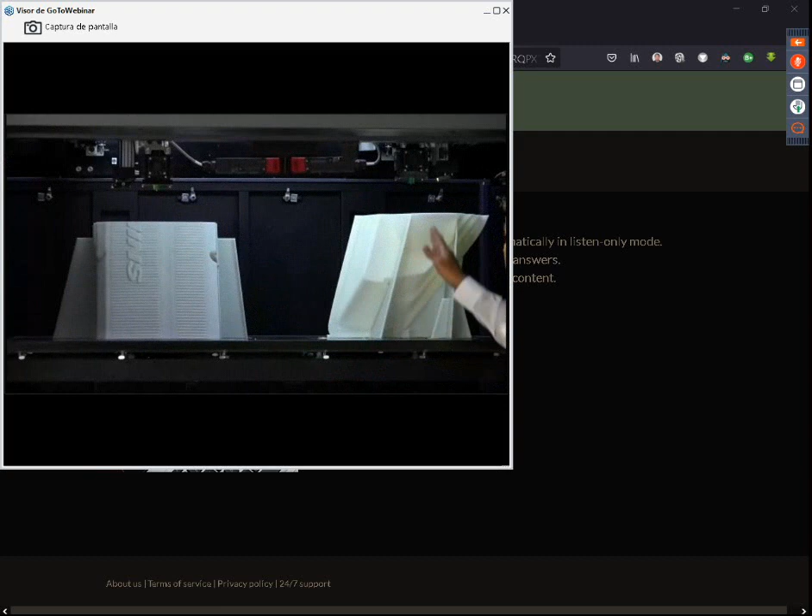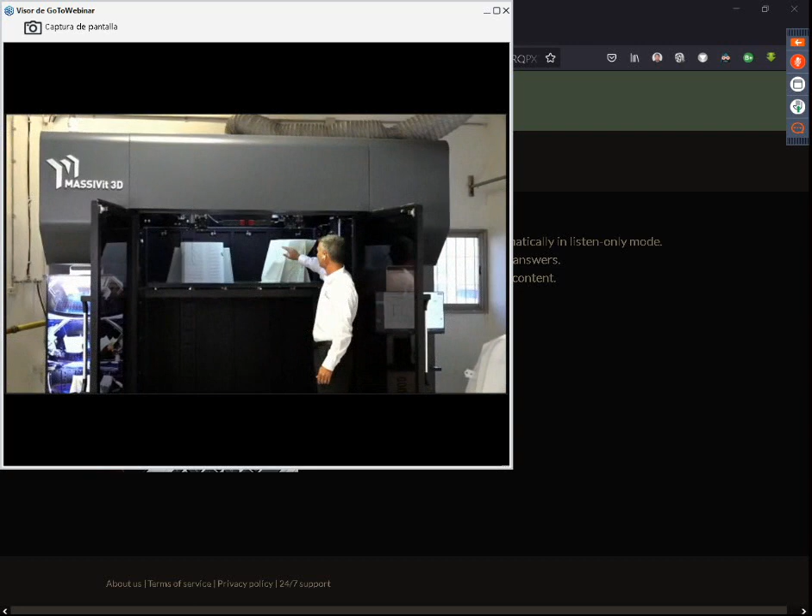On the right head, the other head, we have our DIM 110. This is something we're just launching, designed for industrial application - we're talking about automotive, marine, and rail. What you can see also here, I hope the camera can show it, I'm not sure it's visible, they have different colors, but mainly we're talking about a high resolution image of 0.5 mm.

The DIM 110 gel has a characteristic that enhances your productivity. It can print on one side at higher resolution, like 0.5 millimeter, but it can also increase your productivity with a new mode that prints at 1.5 at an enormous speed - as we said, more than 30 times faster than anyone else.

If I want to summarize, I would say that the Massivit 5000 is presenting the capability to penetrate into new markets. On one side, our existing markets where all our machines are, and on the other side, industrial markets that require high definition, high resolution, and accuracy. We understand that sometimes you need both, and this is what the Massivit 5000 can give you. It lets you enjoy all the worlds, different materials, different applications, as well as different objects at the same time.

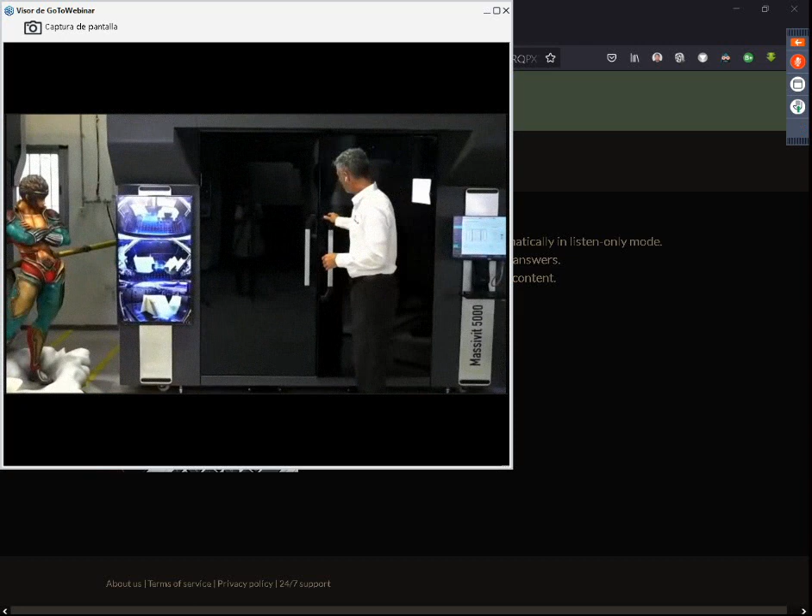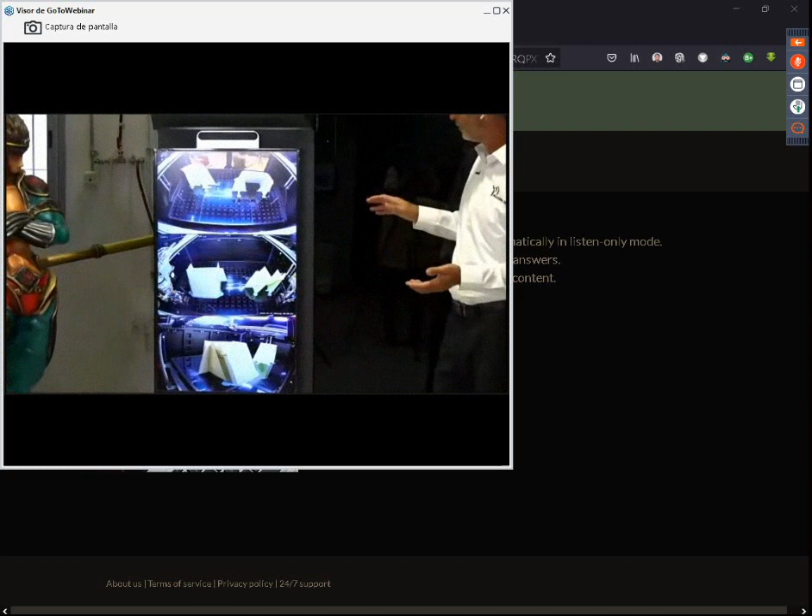Yes, I think it's important that we talk a little bit about the monitoring and the software. The monitor, as you can see here, is showing what is happening inside the machine with three different cameras. It actually makes life a little bit easier for us instead of looking inside the machine, but it can also be part of your marketing activity that you can record.

In terms of software, as we are a developer of hardware, material, and software, we also enhance the software. We have an automatic detection system to allow best-in-class quality. And second, something very important in additive manufacturing is the automatic placement of your object. If you want to print at the best quality and highest speed, you need to orientate it right, and our automatic orientation system will help you do that.

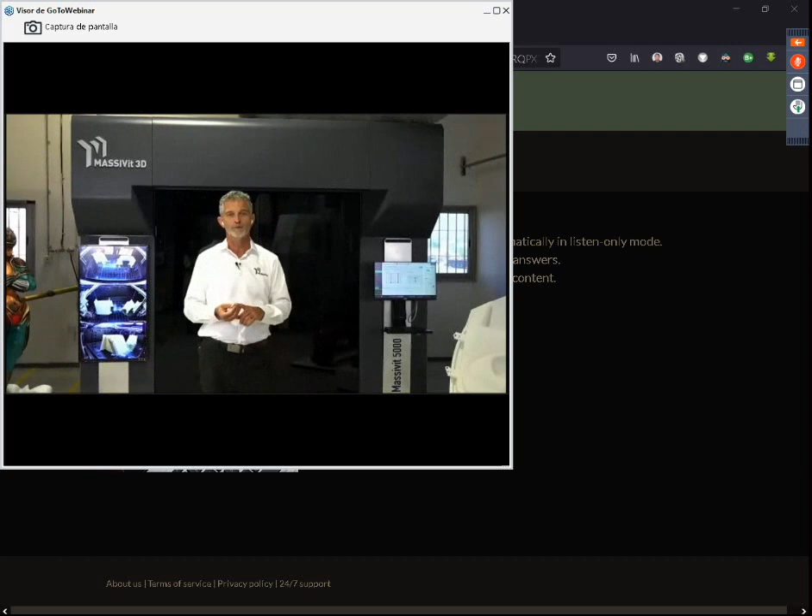I want to thank you, Nir. I really appreciate everybody's work overseas to get the product out. Nir, I appreciate all the work.

I hope everyone online today was able to see how the printer works, really see the functions. Over this last year with COVID, not as many people could come see the hardware. We will be having an open house. We have more and more clients adapting our technology. We can typically get anyone around the world to see a printer in person pretty easily, but Nir's demonstration is probably one of the best. We really appreciate the team putting it together.